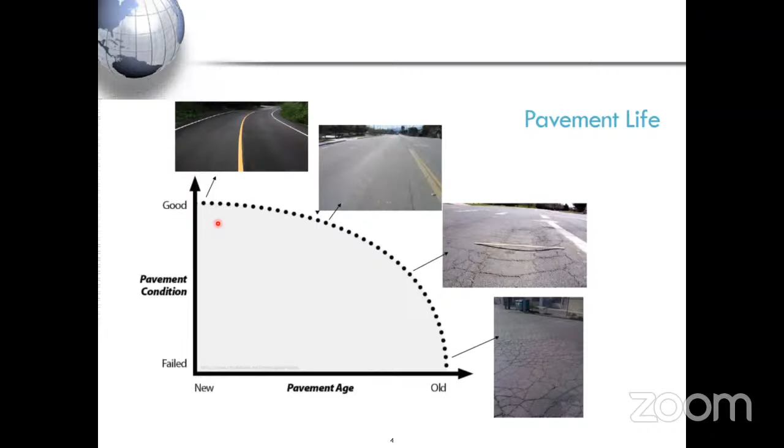But at the same time, we are also talking about words like asset monetization, asset management, or maintenance of these assets. So to maintain these assets, we need to evaluate them continuously. So there's a question - why should we evaluate?

This is how a new pavement's condition, if not evaluated, will in some years show a steep decrease in serviceability conditions, and then sooner or later it will again reach a failed condition.

Similarly, if you do the intervention again, a minor kind of intervention is required again - you have increased the serviceability conditions, it was decreasing again, some minor rehabilitation is done again. If you are not doing something, then maybe at the end of its design life you have to go for major rehabilitation.

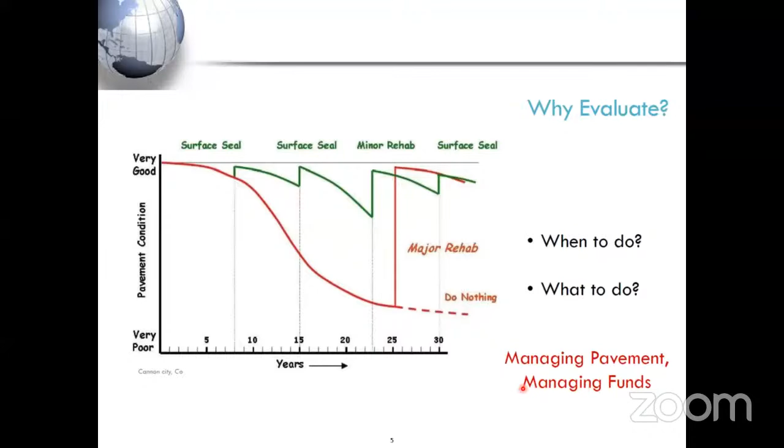This is a very brief general idea: whatever structure or asset we are building, it will deteriorate over time, when subjected to load and climate factors. Especially for pavements, the performance is a function of its relative ability to serve the traffic over a period of time, because that is the main purpose of the pavement. Until unless it is serving the traffic well, there is no problem. The only problem comes when it is not able to serve its traffic.

So it's a system of objective measurement in performance. Now the deep question is whether we should go for a subjective measurement or an objective measurement. Subjective measurement is based on perceptions. Objective measurement is something which gives us quantifiable values.

The period or frequency of evaluation is very much required to find out the structural condition and the remaining life a pavement is having - how much more the pavement can serve satisfactorily before failure. If I find out this design or remaining life, the residual life, I can manage my assets in a better way, but for that I need to do certain evaluation.

For that I need so many tools: collection of data, again some kind of equipment is required for this data collection, and analysis tools for how you are doing the analysis. At various levels you have to do the intervention, so what will be the economic considerations of those interventions? That is part of the analysis.

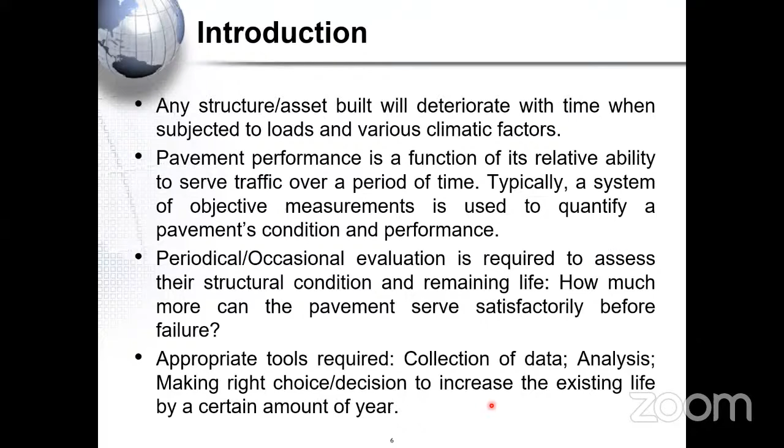And then finally, out of the various alternatives you will have, what are you choosing? So making the right choice and decision to increase the existing life by a certain number of years with limited funds - limited funds is again a very important consideration.

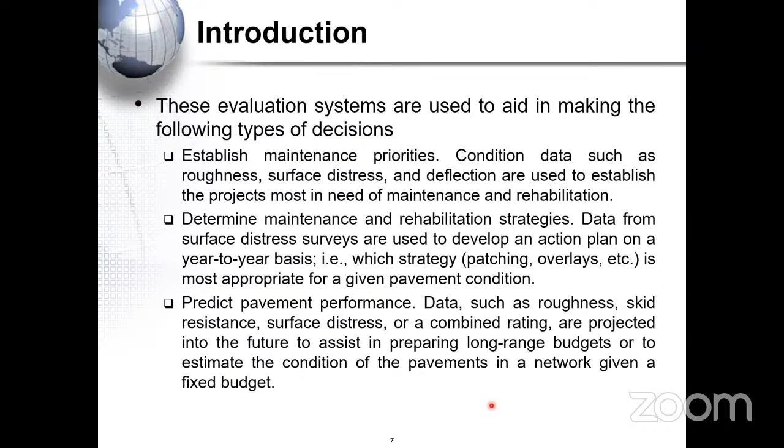We do various kinds of evaluations. We find out the maintenance priorities, then we determine the strategies, and then finally, after doing the rehabilitation, we again do the pavement performance evaluation. So this is all a vicious circle we need to do for our pavement.

Coming to the types of evaluation, most of you are very well known about this area. The two major types of evaluation we consider in our country are the functional and the structural evaluation. We have performance models for both structural and functional evaluations. Some countries consider safety evaluation as part of functional performance, while others consider it a different evaluation altogether - having structural performance, functional performance, and even safety performance separately. This depends on country to country, but right now we are considering safety as part of our functional performance.

We will come into detail about the functional and structural performance. So what we can understand by now is that the rate of deterioration of my pavement is a function of the initial condition.

If my quality control and quality assurance is not good, my new pavement is not well, so maybe the initial condition is not good, and there will be a more severe rate of deterioration. The traffic loading - higher the traffic loading, more the overloading, probably more will be the rate of deterioration. Harsher climatic conditions mean a higher rate of deterioration. Material properties, if not satisfying required limits, again increase the rate of deterioration. Similarly, there are various other parameters like surrounding land conditions and the kind of materials or chemical morphology of materials available - so many issues affecting the rate of deterioration of the pavement.

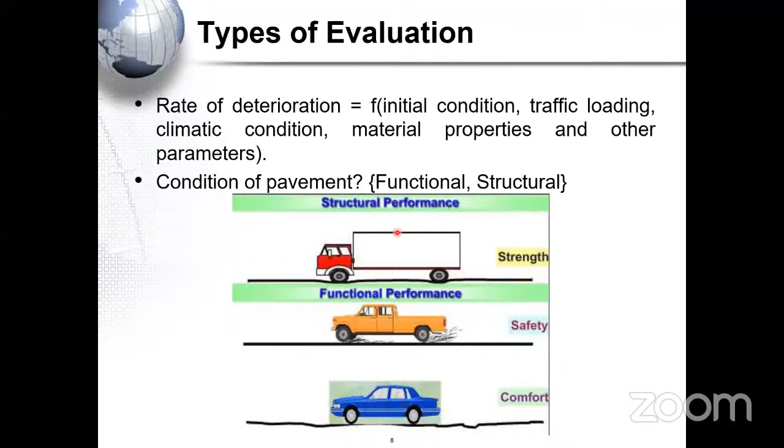But now to evaluate my pavement, I need to do some kind of performance evaluation. I can classify the performance evaluation into two types right now: functional and structural performance evaluation. Functional evaluation, very simply, covers whatever affects the user. For example, if some cracks are there but they are not affecting my riding quality, then probably cracking will not come under functional evaluation. So any structural failure, if it is there but not affecting my functional performance, it is not coming under the functional evaluation.

So it is totally based on the user's perspective. If a user is feeling good on a deteriorated pavement also, it means there is no problem with the functional evaluation, that there is no problem with the functional performance. So what do users expect, or what they want, is basically what we consider in the functional evaluation.

As a user, we always expect a comfortable, safe, and economic ride on our pavement surface. Strength is not considered as a factor by the user, and most users do not know what the strength of the pavement is. Only we pavement engineers know about the resilient modulus values of each layer, the CBR value of the base and sub-base layers. Most users know nothing about this. For them, if they haven't experienced any bumps, it was a very comfortable ride. So strength is probably not considered as a factor in the functional evaluation.

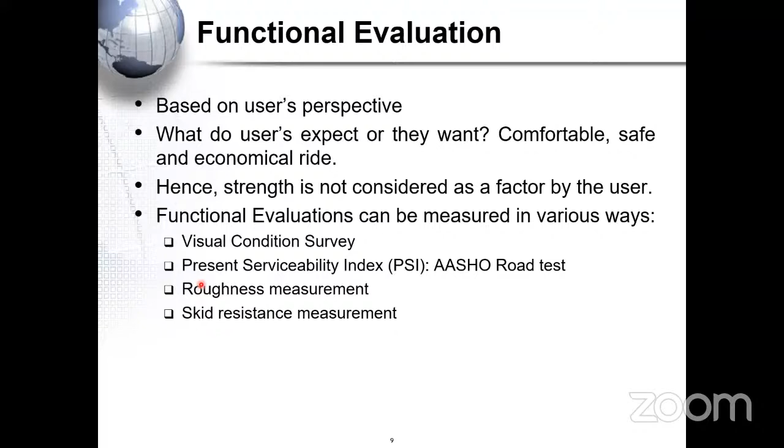When I talk about the first one, the distress evaluation, mostly it consists of a visual pavement condition survey. This visual pavement survey is sometimes easy and sometimes tough. For a small section, it is very easy to do this visual pavement condition survey. But for sections like kilometers long, hundreds or thousands of kilometers, it becomes very difficult to do this visual evaluation.

What we evaluate in the visual survey is the type of the distresses, the extent, and the severity. Extent means how long it is there in the section, and severity means how severe it is. If you talk about cracks, it's the width of the cracks. If you talk about potholes, it's the area and depth of the potholes. All this represents the severity of the visible distresses, so that corrective action can be taken.

For example, with cracks, they identified the length of the cracks with the help of a thread. Then they identified the width of the cracks, maybe within the range of less than 1 mm, 1 to 3 mm, more than 3 mm, etc.

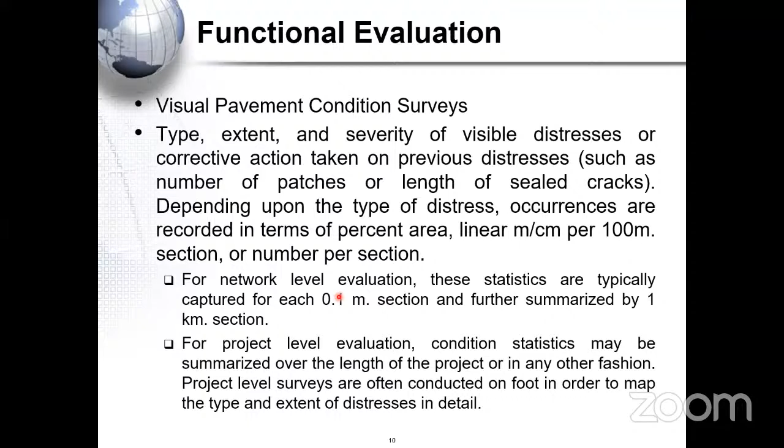When you are doing things verbally or visually by walking, you can visualize many distresses in more detail. But when you have to cover lengths of kilometers, sometimes the extent of detail is missing in those evaluations. These are some of the distresses observed in flexible pavement.

Right now I'm not going into detail, just taking the names. If you are already acquainted with these distresses, it is all good. If not, you can easily search on Google images, sometimes these are very easily seen there.

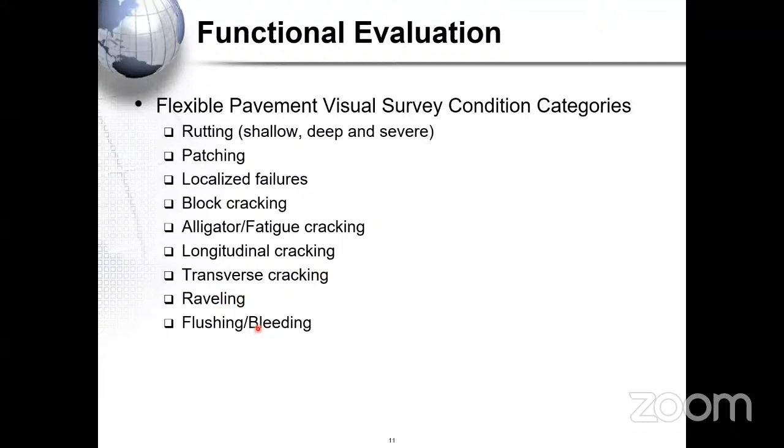Distresses like rutting, patching, localized failures, block cracking, alligator or fatigue cracking, longitudinal cracking, transverse cracking, raveling, flushing, bleeding. For rigid pavements there are spalling, punch outs, sometimes patches of binder, concrete patches or cement patches.

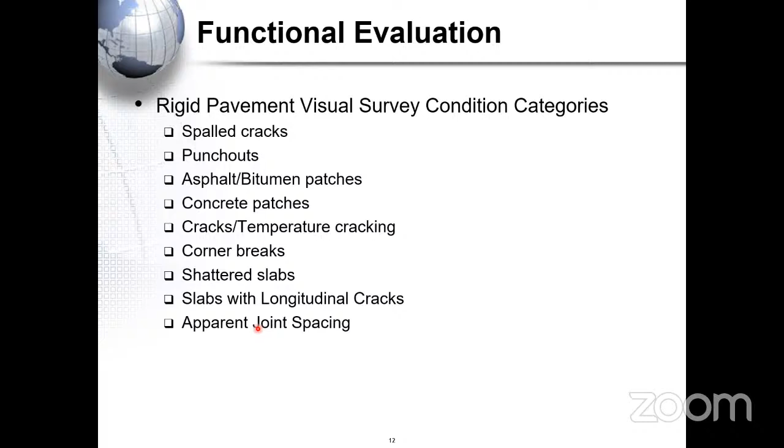Then there are temperature crackings like corner breaks, shattered slabs with longitudinal and transverse cracks. Then joint spacings opening up. All these are different kinds of failures.

Now coming to the evaluation part, how the history started. Initially, in 1962, people started the first road test designed by AASHO, and the outcome of that was PSI, the Pavement Serviceability Index, which they developed.

It was basically based on two different things: one is roughness and one is the distress condition of the pavement. After that, people developed a few more things like roughness index based indices, but that is totally based on roughness, with no incorporation of distresses in those indices.

There are different types of distress ratings, maybe from 0 to 5, where 0 to 1 is considered very poor. This could be filled out by a person or a group of people, and then you can come out to the average value.

The pavement classes can again be classified into different types. These are just examples, because different DOTs in the US have some different classification formats, so they classify pavements using different PSI values.

Depending upon these PSI values, you can easily find out what preventive maintenance you need and at what stage you have to take it, because this is already guided by particular DOTs or guidelines followed in different states.

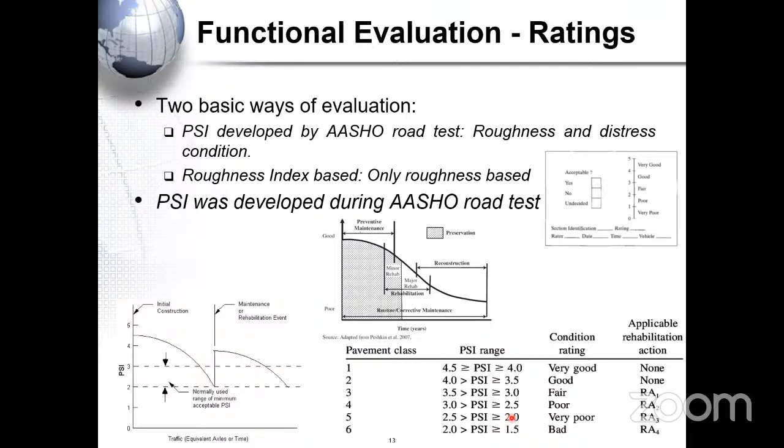Initially it was started with a group of 5 people. Out of those 5, one should definitely be an engineer in charge of that particular road, one should be an expert in pavement engineering or pavement maintenance, and one should be at least a regular user of that road who doesn't know anything about engineering. So these are the 3 minimum persons which should be there.

It could be 2 users with 2 engineers and 1 expert, or 2 experts with 1 engineer and 2 users, but these are the 3 different categories of people: user, engineer in charge, and pavement expert. These 3 should always be there to come to a general average rating value, identified between 0 to 5.

The PSI is a mathematical combination of certain parameters like slope variance, cracking, and patching distresses. We'll discuss these things. The performance index is the summary of the PSI over a period of time.

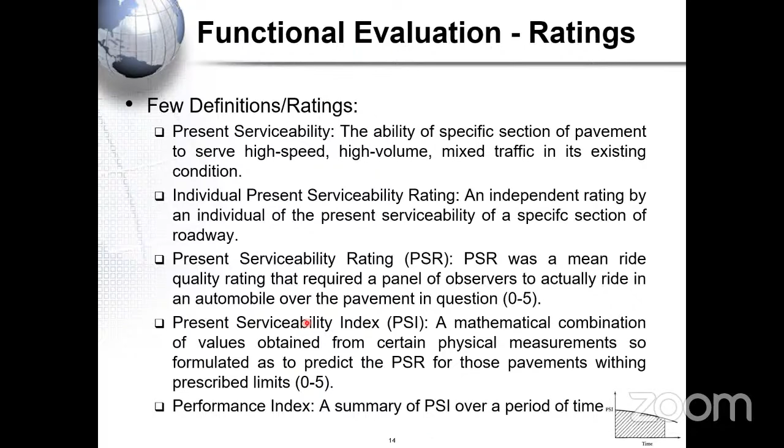I have not discussed these things in more detail because presently our focus is more on the evaluation part. So now coming to the objective, the first objective measurement which was given after the AASHO road test.

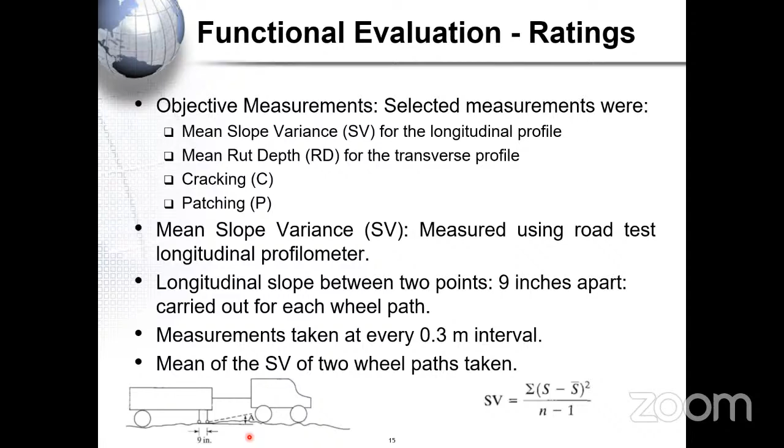Obviously this is a starting point of the evaluation techniques. I'm less focusing on this part because our idea is to discuss the present evaluation techniques and the futuristic evaluation techniques. So kindly bear with me if I'm going fast from this point, because I'm not going into much detail due to limited time.

Rut depth can be easily measured with the help of a straight edge, and in between we can find the depth with the help of a vernier caliper to be more accurate. This measurement has to be taken after every 6.1 meter interval.

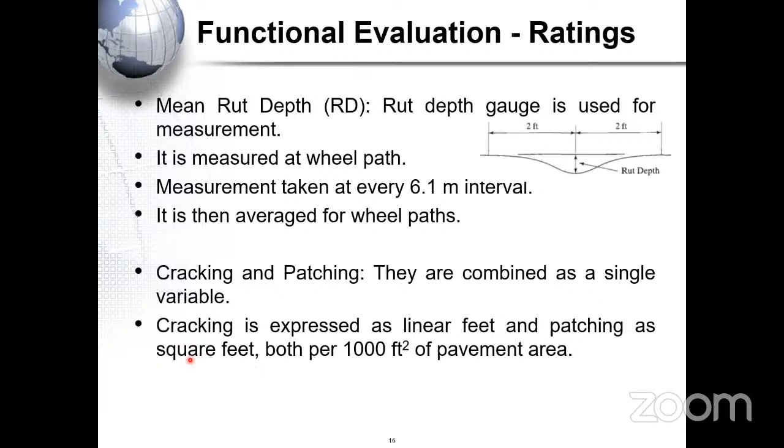Cracking and patching are both combined as a single variable, and they can be expressed as linear feet for cracking and as an area for patching, both per 1,000 square feet of the pavement area.

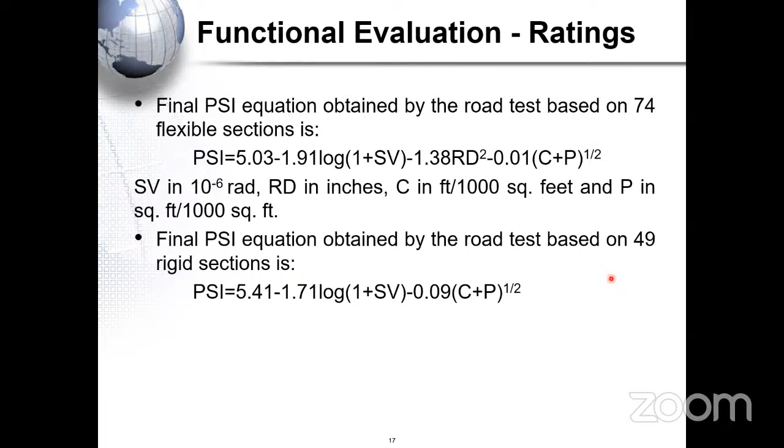So these equations basically use FPS units, because that was more prevalent in the USA. Still, many countries are relying on the PSI equations for deciding their maintenance alternatives.

But there are a few deficiencies in these PSI equations, because as I keep discussing, this equation was developed in 1962. The perception of people might have changed regarding serviceability in the last 4 to 5 decades.

Like at least the pavement is there, we are good - that was the expectation 4 to 5 decades ago. Now our expectations are very high with the pavement, so maybe these equations may not give you a correct serviceability index.

It includes both rideability and surface defects. The cracking and patching are something like your surface defect, and your slope variance talks about your rideability, since slope variance is more about the roughness part and cracking-patching more about the visual distresses part. So it is always good to have two different indices for these two different entities.

Again, for finding out roughness through slope variance, we need to use the profilometer, because there was a 9 inch gap between these two wheels to find out the slope variance. Nowadays we are not using profilometers, so these are some of the deficiencies that prevent us from using these PSI equations now.

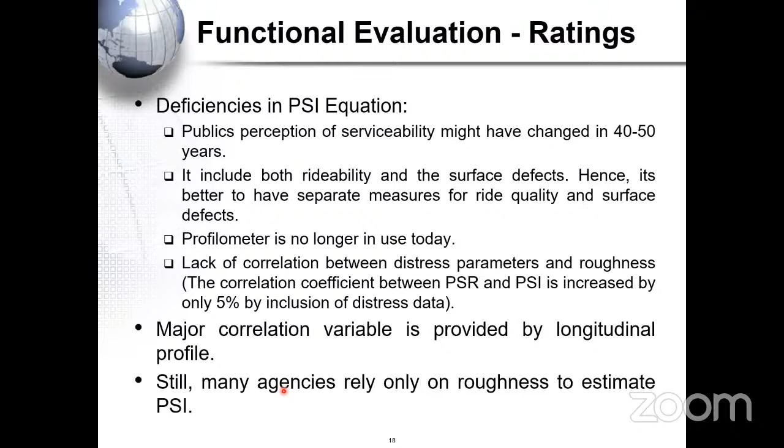Still many agencies rely only on the roughness to estimate the PSI. So there are few agencies that totally rely on the old PSI, specifically the roughness based PSI. What they have done is evaluated some roughness based indices, and then correlated those indices with the PSI, so you can find the PSI and correlate it with roughness only. This is how they have done it.

What became more prominent, more prevalent, and what happened after this test, was that roughness was being more explored by the people, especially in a big experiment done in Brazil.

They came up with a new parameter known as the International Roughness Index. It is considered to be a better parameter for measuring the road users' response in terms of comfort and convenience.

There are many equipments which can be used to find out the roughness in terms of IRI. The fifth wheel bump integrator we have used in the country since long, still we are using it. Merlin is a low cost equipment, although it's manual, we have to use it manually, but it is very cheap and cost effective. Sometimes this Merlin equipment can be used for checking the accuracy of our fifth wheel bump integrator also. Nowadays we are using much more automated equipments, which are based on laser.

Now coming to the IRI part. The roughness, people started working on it and realized there are two different methods of finding out the roughness: one is the direct method and one is the indirect method.

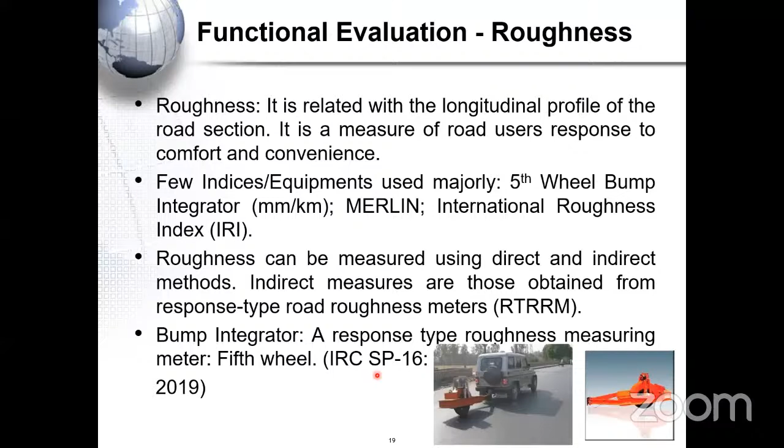This fifth wheel bump integrator, more details are given in IRC SP 16, the new version is 2019. It has to be used at a constant speed of 32 kilometers per hour, which is a good speed to cover long distances. The minimum standard tire pressure has to be maintained at 2.1 kg per centimeter square.

Whatever the vertical shocks are, that gets recorded in the fifth wheel bump integrator. The distance traveled is measured by counting revolutions of the wheel, there is a counter which finds the total revolutions and we find the total distance traveled. From the accumulated values of these vertical strokes we can find out the IRI. Although it doesn't give the IRI directly, it gives the value as BI. From that BI value, we have correlations by which we can express BI into roughness values in terms of mm per kilometer.

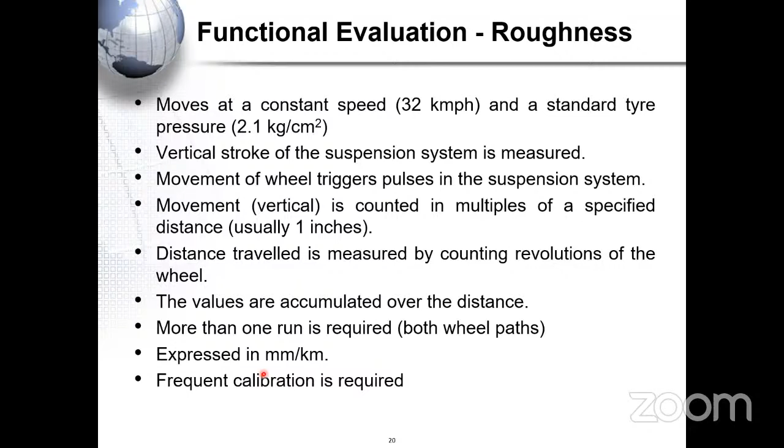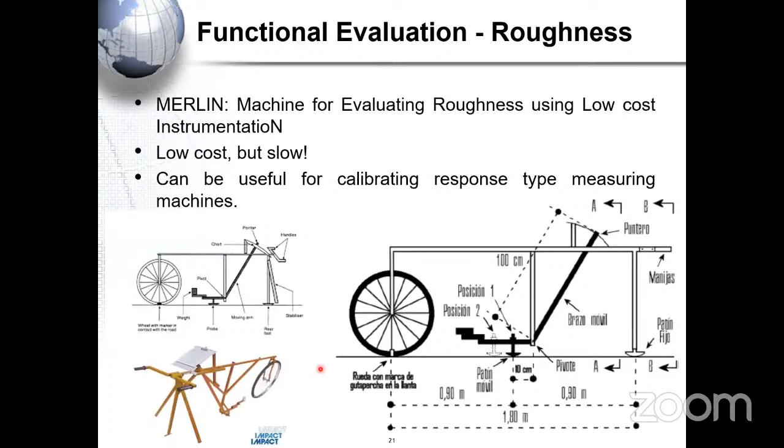Frequent calibration is required, which we can do with the help of the Merlin. This is a low cost but slow equipment, we can walk through this equipment. It has been designed by the Transport Research Laboratory in the UK, TRL.

The person who invented it was Cundill, M.A. We need to note down 200 values on a graph paper which is there on the sheet on our Merlin. After every revolution, you need to note down these points, and then you have to come to the value of D.

The value of D means the characteristic distance in which 90% of these roughness indicators are within this distance. Within this characteristic distance, you can find out the various values of IRI for different kinds of road surfaces as given in the manual.

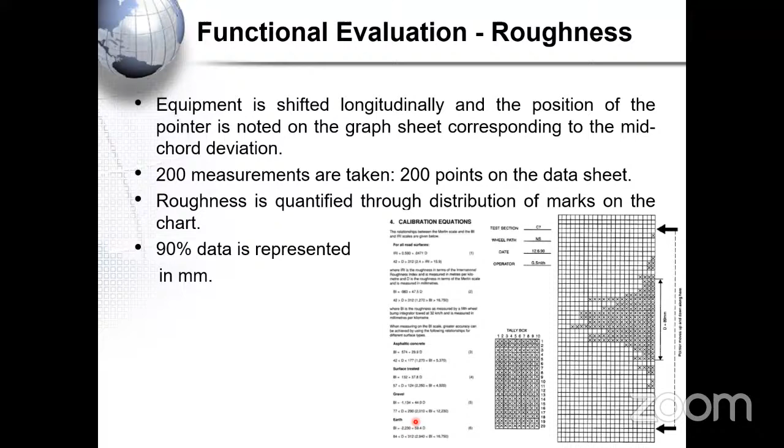So this is how the old things were. Nowadays we are using much more advanced equipment, something like laser profilometers, which have laser beams in the equipment ahead. Whenever it is moving, it gives laser beams and measures the profile, noting down the profile of the surface.

That profile surface is directly given in terms of values and directly given in terms of images to us. The good thing about this equipment is that it can do the survey as fast as 30 to 100 kilometers per hour. You can install this laser profilometer normally in front, sometimes in some vehicles they install it at the back also.

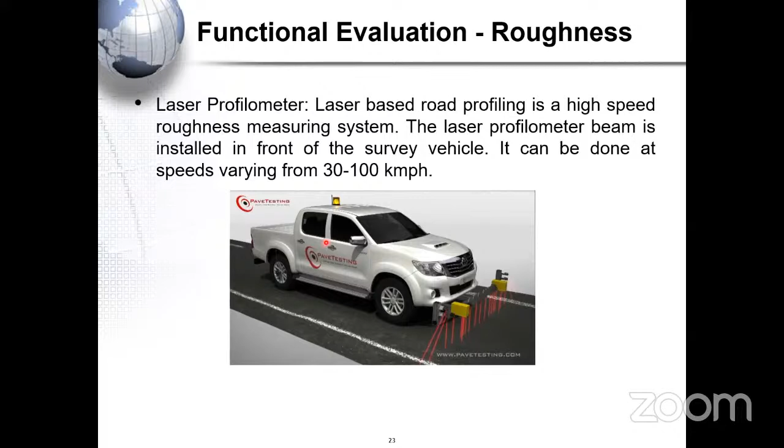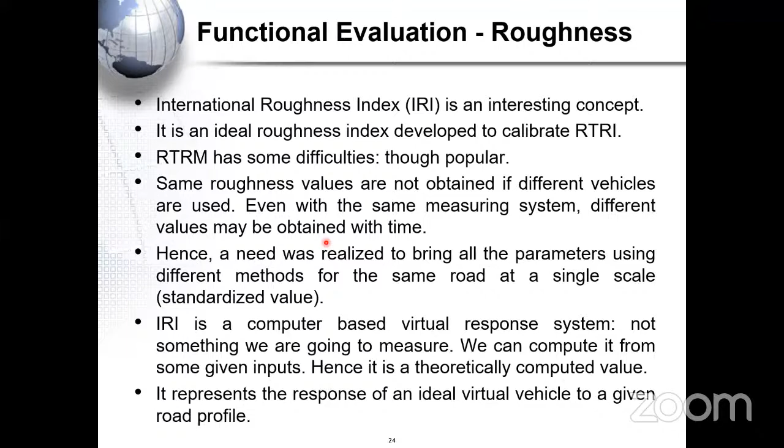The IRI is an interesting concept, but I think we have already covered half an hour, so it is not wise to cover the idea about IRI right now. So I'm skipping this IRI part for now.

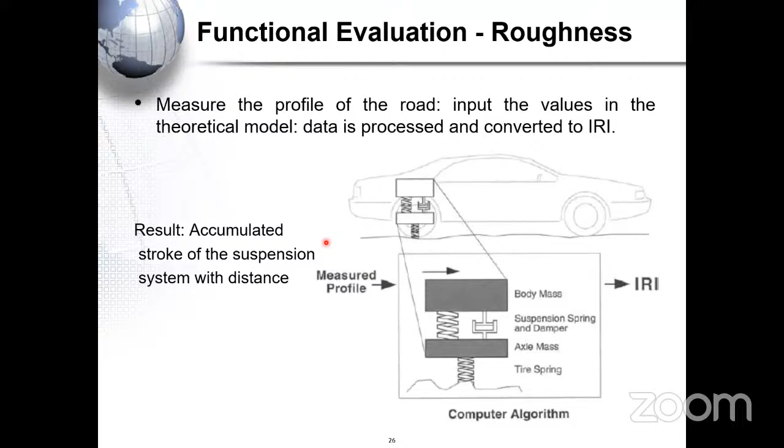Okay, it's a very interesting concept, the quarter car model - how these suspension and damping mechanisms are correlated with the IRI. It is a kind of indirect measurement which we have to use. These are the standards for the golden quarter car model: the stiffness should be 63.3, the stiffness of the tire spring should be 653, and we also have the damper rate, axle mass, and speed of the vehicle.

Now, the good thing is that we have given all our roughness index values on the IRI basis. With the IRI basis, we can also decide the kind of surfacing, depending upon the IRI. So if we are doing bituminous surfacing like BC, SMA, or SDBC, the minimum IRI we should get is in a certain order, and then we can classify these as good IRI surfaces, fair IRI surfaces, or poor IRI surfaces.

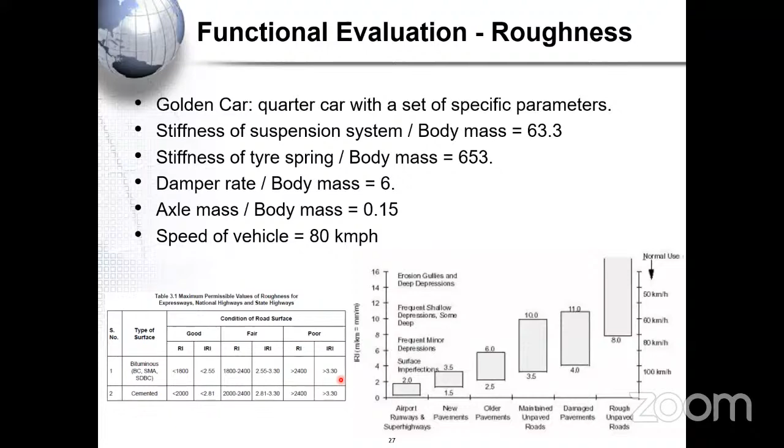All these things are given in IRC 82, the code for the evaluation and maintenance of flexible pavements. This also gives recommendations for selection of the appropriate roughness equipment - what kind of equipment you can use for different kinds of terrain and different speeds.

For terrain like plain, rolling, or hilly, at speed ranges of 10 to 40 kilometers, you can use various equipment like the fifth wheel bump integrator, automated road unevenness recorder, or even the car axle mounted bump integrator, etc.

For high speed facilities, normally now we have to use the laser profilometer or the ultrasonic sensor based profilometer. Most of our highways which are coming now have laser based profilometers included in the contract. So that is what we need.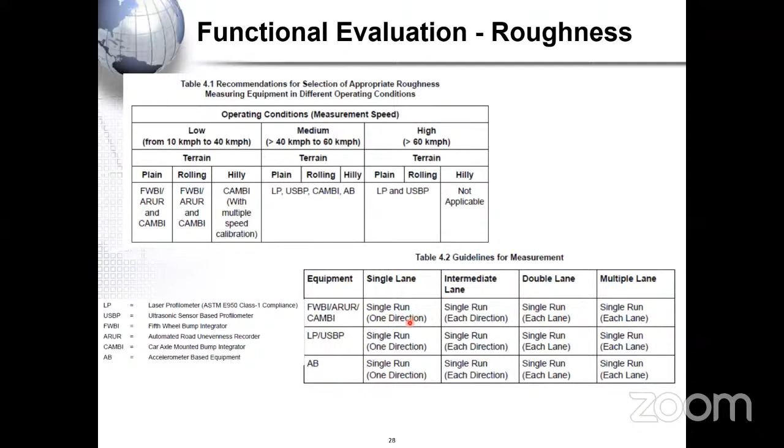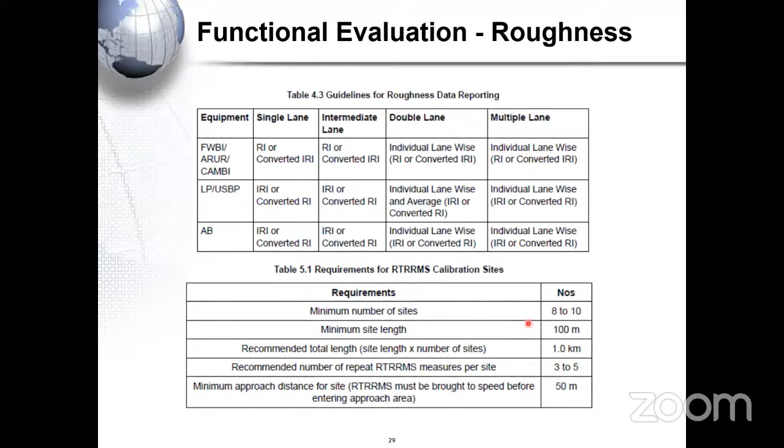Even the guidelines for measurement are given, like whether we have to do a single run in one direction or in both directions, up and down. All these things have been given in our code. Similarly, the guidelines for roughness data reporting - either you should give it in terms of roughness index or international roughness index values. IRI is normally a more prominent parameter which we normally use. For how many sites you need to calibrate is again all given in IRC 82.

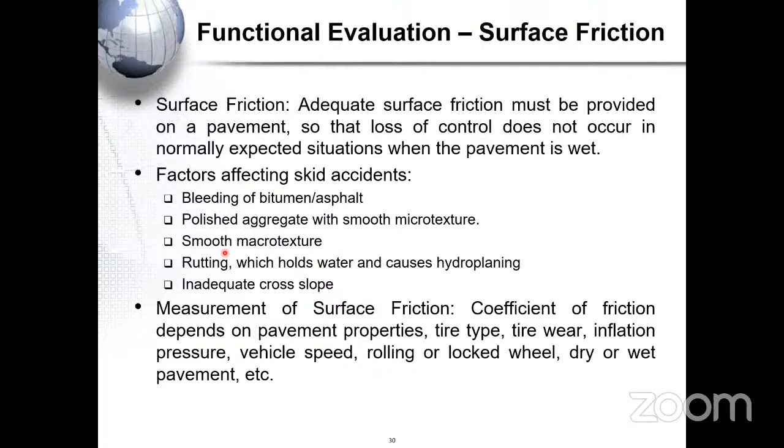Surface friction is again a second type of functional evaluation. We are more concerned about the safety of our vehicle - adequate surface friction should be there on the pavement so that we cannot lose control of the vehicle in expected situations, especially when the pavement is wet or slippery. There are a few factors like bleeding, polishing of the aggregate, smooth macro texture, hydroplaning, or inadequate cross slope which are considered.

Now, to find out the skidding, we are basically finding out the skid number. This skid number is directly correlated with the coefficient of friction, which is again a kind of dynamic value that exists when the tire and the pavement interact. Now this can be evaluated by various ways.

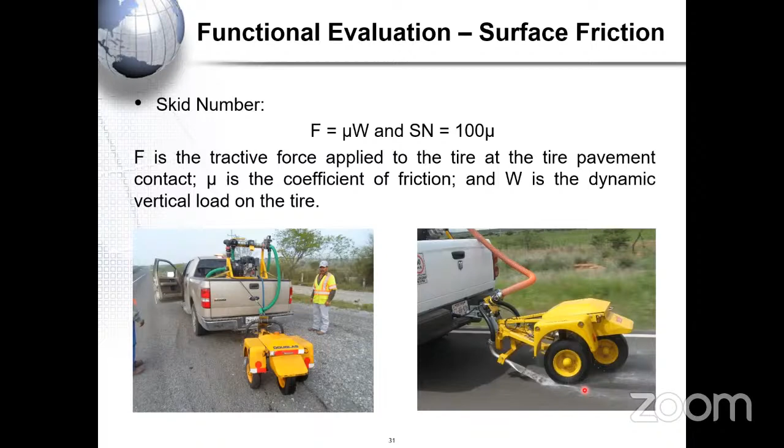This is a mu meter kind of equipment in which you can do it in a dry condition also, or even in a wet condition. So you do not need to wait for the rainy season - it can directly spray the water, and in that spraying of the water it can find out the skid number or the coefficient of friction. This is most widely used - very cheap, and mostly available in the labs also.

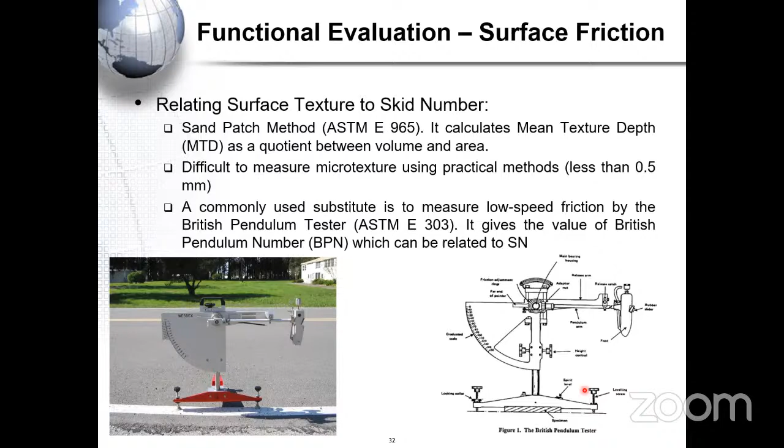The British pendulum tester can also be related to the skid number. It gives you the BPN value, and that BPN value can again be correlated with the skid number.

Now coming to surface defects, the best one is always the visual one, because once you visualize the distresses, as a human being you can use your brain for many things, including finding out the reasonings. But nowadays you cannot do a visual distress survey for kilometers of length, so you need some kind of image sensing technologies. Nowadays a combined vehicle having the laser profilometer and all these cameras can give you all this automated data.

These surface defects - cracks, deformations, disintegrations - all these can be found and done with the help of imaging techniques.

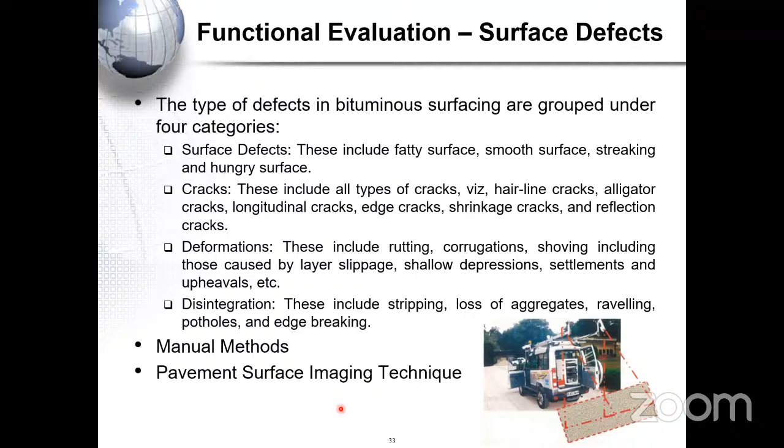Although there are some image based programs which are coordinating these machines, you need to be very sure about the accuracy of these programs, because sometimes the accuracy of these programs are not very good. So you need to again cross check these things with small stretches where you have already done the visual survey. You cannot directly and blindly follow the results coming out of the equipment.

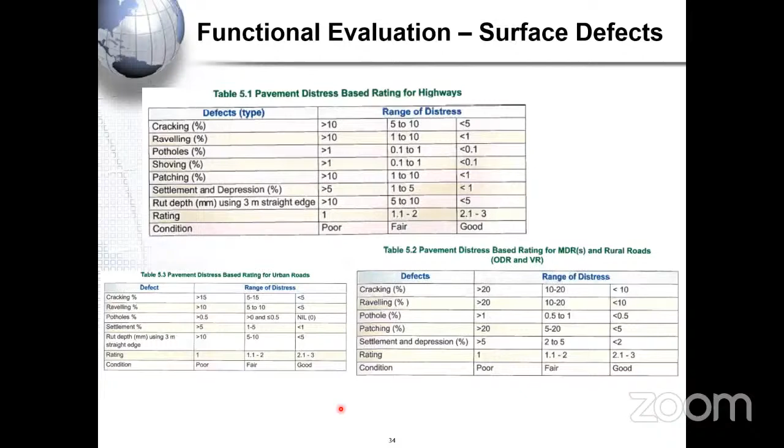This is just from the IRC 82. I've just taken what are the permissible levels of the distresses available, and how we designate these levels into poor, fair, and good conditions for the highways, urban roads, MDRs, and rural roads. This is the distress based measurement proforma given in the IRC.

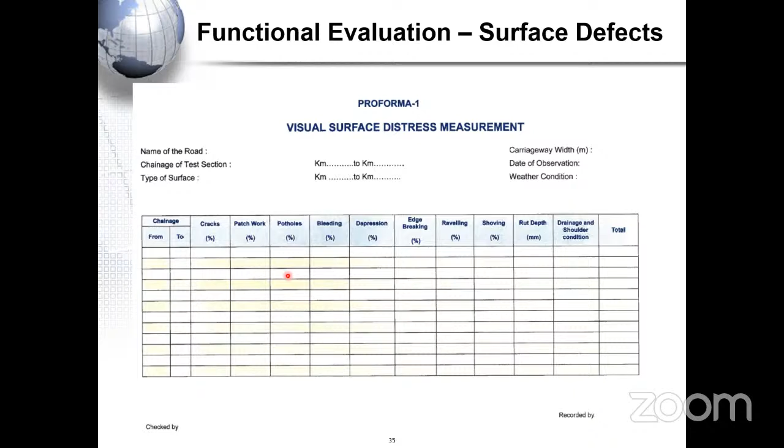This is again in terms of the area if you want to find out. These are some utility or weighted values, because there are so many different types of distresses. At a section you can get a high cracking but less patching, but you have to come to one value of either good, fair, or poor. So by the weighted values you can arrive at these values, like it's a good, fair, or poor condition.

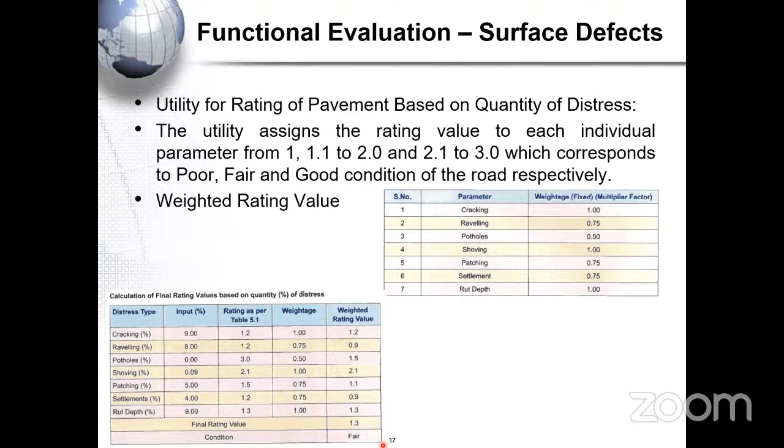These are some indicators of evaluation, some futuristic things about our pavement evaluations. Most of you must have heard that nowadays we are using a lot of unmanned aerial vehicles. There's a lot of research going on in this area of using UAVs or drones for evaluation or functional evaluation of our pavements.

The benefit is that a large area can be covered in a small time. Another benefit is it does not affect our traffic, since there's no vehicle moving so it will not disrupt traffic. The data, if we have the software, can be analyzed very fast. So whatever data you have, you can analyze it early and then come to the maintenance alternative.

But believe me, all these are giving you some kind of objective evaluation of your pavements. The decision still has to be taken by the engineer. The maintenance decision still has to be taken by the engineer.

Then there can be some application of intelligent systems. You can use artificial intelligence programs also, so that if they are finding some distresses, some kind of cracks, using artificial intelligence they can even find out the cracks. So if they can find out that alligator type cracking is there, which has already been fed into the AI systems, it can tell you that probably fatigue failure is there. So you can use AI and ML techniques as a supplement to this data which is coming through the UAV or drones.

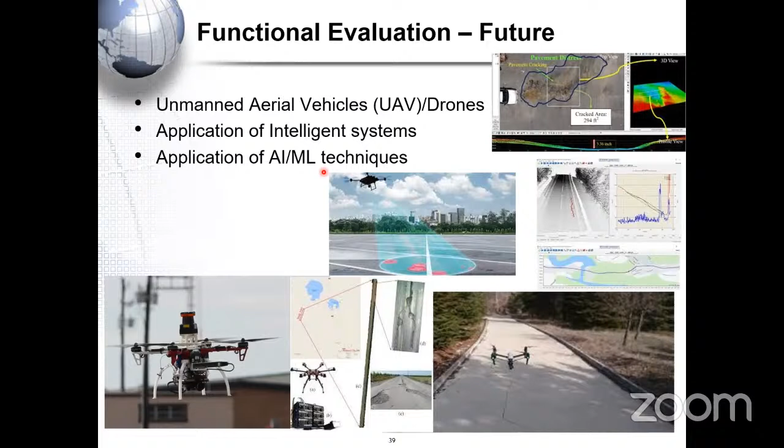This is something about Bangalore I was reading. There was a thing that even for low volume roads now they are scanning it with the help of UAVs, the unmanned aerial vehicles. So this kind of technology is hitting the ground very fast. We need to be very vigilant, but we should be very clear about what are the advantages of these techniques and what are the disadvantages, or where we should be careful while using these techniques.

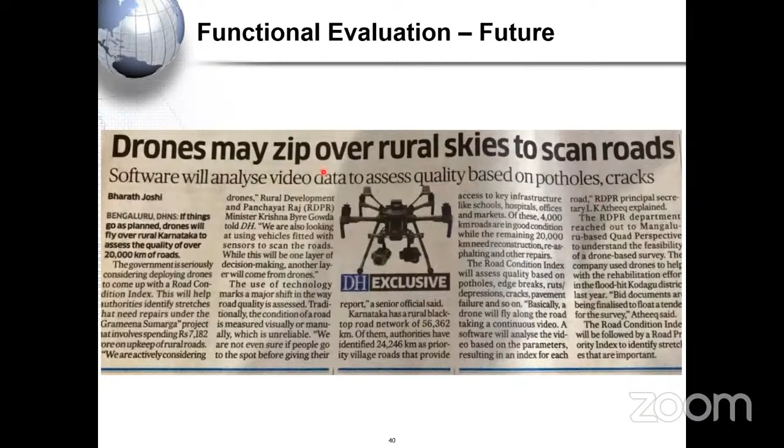Coming to the other part, the structural evaluation part. We are more focused on the structural condition of the pavement. Maybe my surface is very good, the users are very happy with the road, but I need to evaluate the structural condition because maybe there is some failure which has initiated from the bottom of my layer. So therefore I am very much concerned about the structural evaluation. It is majorly required for finding out the remaining life of my pavement.

And if the remaining life is less, then I can go with the overlay thickness.

The two major types are destructive and non-destructive. In destructive testing, we have to cut the pavements, by making big holes or by taking cores, collecting samples, and testing in laboratories. In non-destructive testing, we apply a certain loading and get the responses for those loads, or use different kinds of waves traveling inside the pavement layers. The movement of those waves can tell us about the material properties of those particular layers.

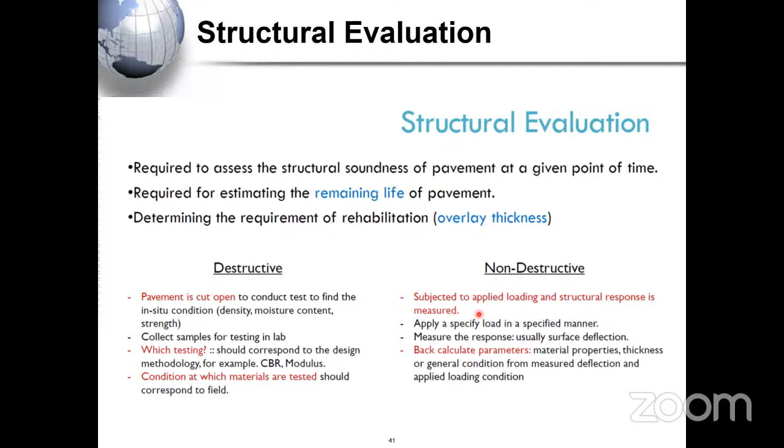Then we can do a kind of back calculation. How this structural evaluation started is again the same kind of test done by WASHO, the Western Association of State Highway Officials, and then CGRA, the Canadian Good Roads Association. These were the two agencies who started structural evaluation long back.

Their whole idea was to find out the deflection value, and they correlated the structural performance of a pavement on the basis of the maximum deflection value.

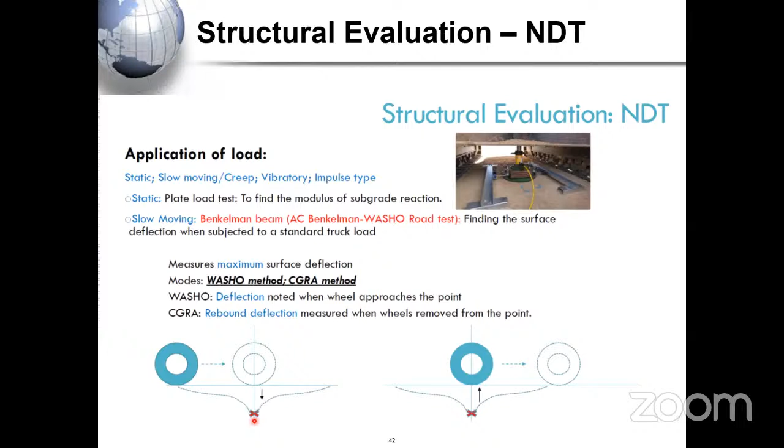There were some shortcomings in this structural evaluation because different kinds of pavements could get the same amount of deflection value, but the pavement responses could be different. For one pavement, a long distance is facing some deflection, and you get the maximum deflection there. For another pavement, the maximum deflection is the same, but the response is limited to a certain distance. So a single deflection measurement sometimes does not give an accurate value.

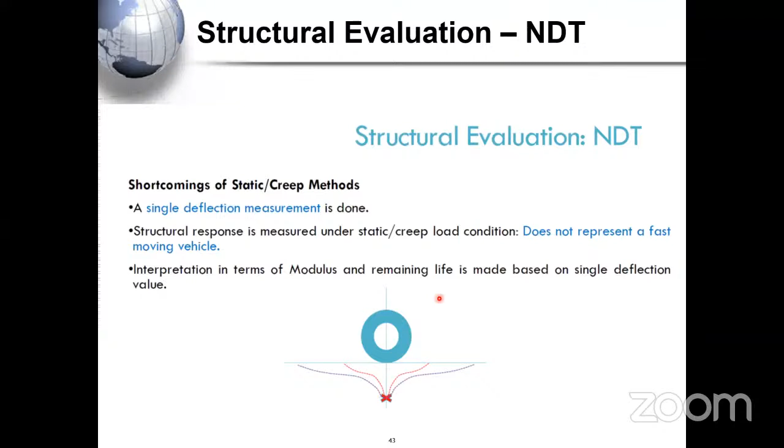We realized this, and then moved from the Benkelman beam deflection to the falling weight deflectometer method. The structural response was initially measured under static and creep load conditions, which only represents a slow moving vehicle, not a fast moving one. We interpret this maximum deflection value into modulus and remaining life, which is probably not a very accurate method.

So then we started with the falling weight deflectometer, which gives you the full deflection bowl - the response bowl obtained by various geophones attached to this falling weight deflectometer. You get a full deflection bowl, and probably more accurate values of the surface properties or modulus values can be found out.

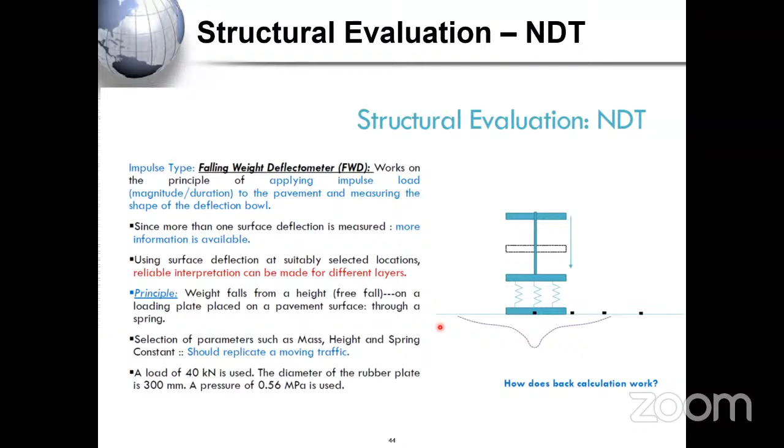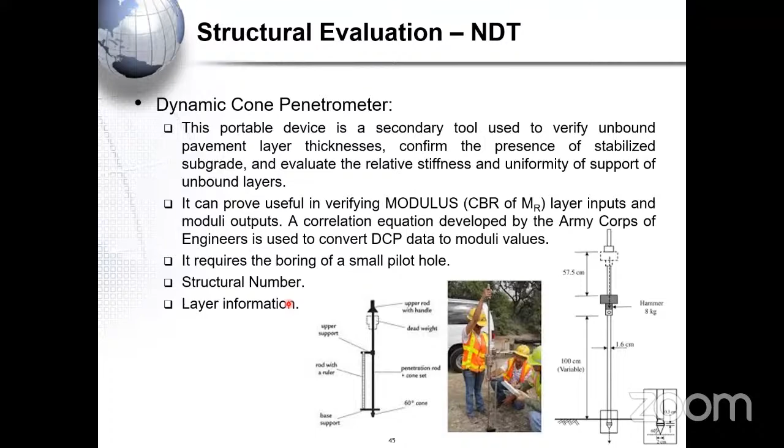This is a simpler one, the dynamic cone penetrometer - a low cost, portable device. It can be correlated with CBR values, but it should only be used for unbound layers. It's not wise to use this equipment for bound layers like bituminous layers. It's always good to use the dynamic cone penetrometer for unbound layers, like base, sub-base, or even subgrade. It can give various information like layer information, modulus values, and even the structural number of the layers beneath - structural number being a kind of number representing the strength value.

Then, and still in a few areas, the air coupled ground penetrating radar, or simply GPR, is being used. It's a van mounted system providing a continuous profile of layer thickness and dielectric variations - basically variations in terms of modulus or strength values - to a maximum depth of about 60 centimeters or 600 mm beneath the pavement surface.

So with that layer, we can easily find out the strength properties of our bituminous layers and the base and sub-base layers. The dielectric properties are correlated to material density and moisture content, so subsurface problems in existing hot mix asphalt and excessive moisture in base layers can be easily detected. GPR can also identify segregation of materials beneath the layers and low density of materials in existing HMA. For PCC, or cement concrete pavements, it's not much useful because of the similar kind of material present.

Even nowadays they are using this GPR on drones, which is again a kind of future research. People are still finding out the appropriate height the drones should fly at to note down these values.

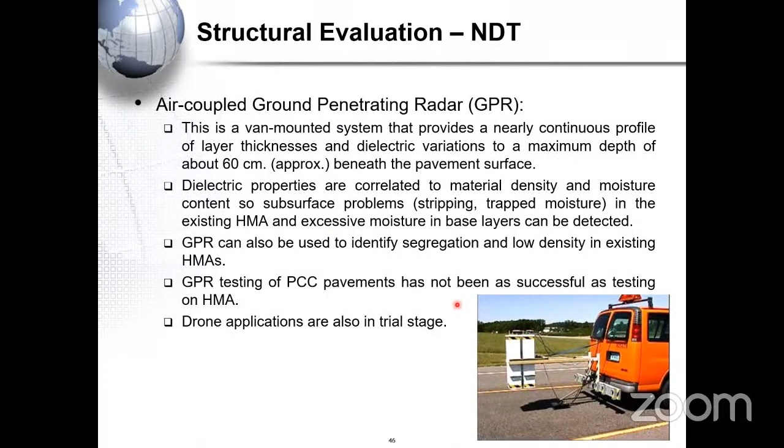Then there are some ground coupled GPRs. The only difference between these and the air coupled one is that it is in the air, so it is not having a direct contact with the surface. The ground coupled one has more surface contact. That's the only difference. I'll not go into much detail about the working methodology of the GPR.

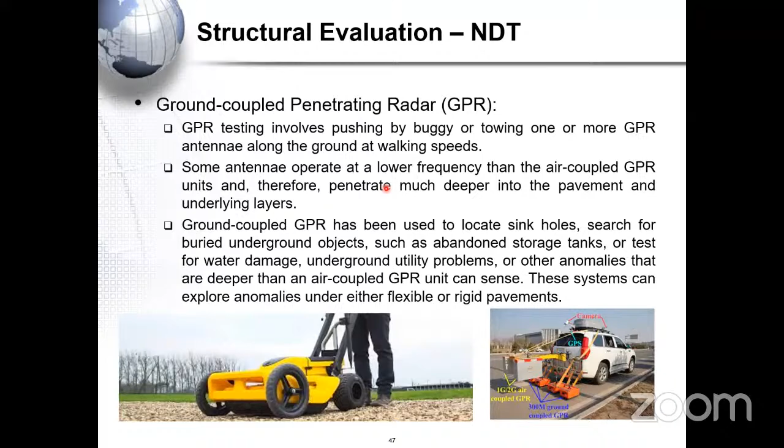Then coming to the seismic based tools, the fundamentals are again the same: we are basically imparting a wave, which is traveling in the pavement surface, and on the opposite side we are encountering those waves. The time period in which the wave is traveling gives an indication about the material properties. This is the portable seismic pavement analyzer. There are different types like Dirt, SPA, V-meter, free-free resonant column.

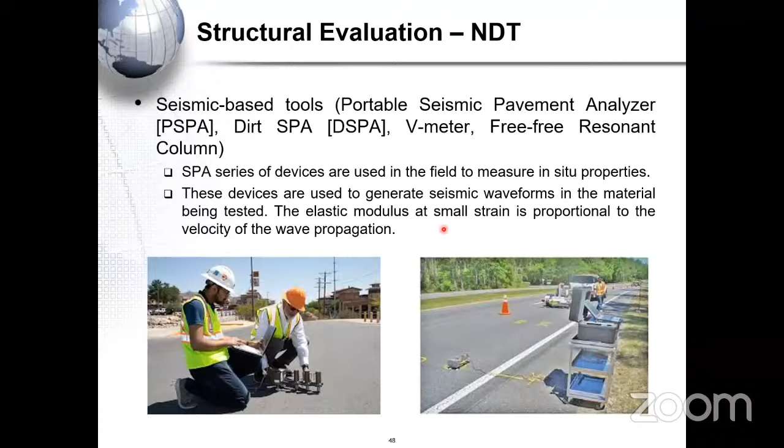There are some changes in their technologies. I am not very much aware, as I have not worked in this area. These portable seismic pavement analyzers are devices used in the field to measure the in-situ properties of the pavement layers. They generate seismic waveforms in the material being tested. The elastic modulus at small strain is proportional to the velocity of wave propagation, and this device works on that principle.

Then there is something more advanced, the total pavement acceptance device, a very costly one. It is majorly used for airport pavements, by some of the busiest airports, or for some expressways. Still in India, I have not seen anyone talking about or having this kind of device.

This device has the capability of everything. It talks about the rolling dynamic deflectometer, so it is rolling, and with its help it takes deflection values and also does GPR. So it's an air-coupled GPR combined with a deflectometer, both things are there. Additionally, it gives a high-definition video of the surface, linear offsets in terms of the two wheel surfaces, high precision differential GPS coordinates, and surface temperature logging, up to the pavement sections, conducted simultaneously. So there are many things done with this total pavement acceptance device.

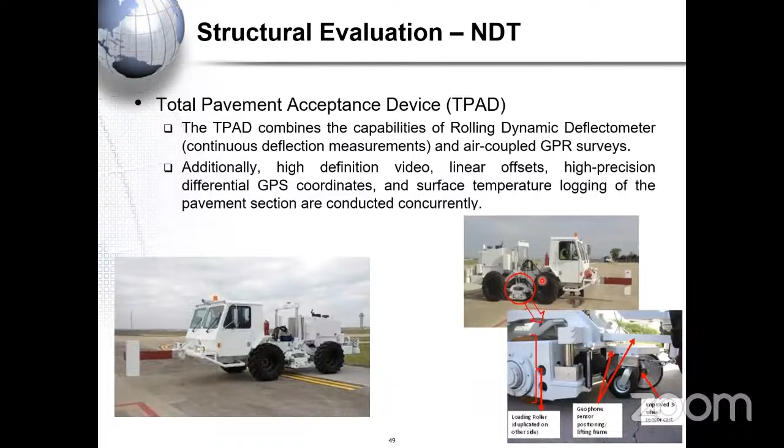The last one, we can always do these things with destructive evaluation, which is a more conventional method. We can cut down some excavated area, or take some cores, and then find out the properties in the lab. That is the destructive evaluation of pavement structural properties.

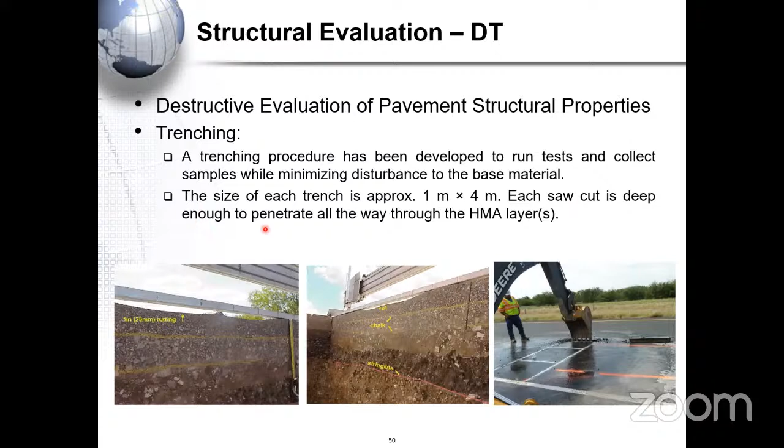The first one is trenching, a big area which you need to trench down. Trenching has been developed to run tests and collect samples while minimizing disturbance to the base material, so we disturb only the surface layers, not the base. The trench sizes are larger, in the range of 1 meter by 4 meter, and each saw cut is deep enough to penetrate all the way through the HMA, so all the HMA layers are cut through.

Otherwise, the most widely used type of destructive evaluation worldwide is coring. We take core samples with a 10 centimeter bit or a 15 centimeter bit, meaning core bits of either 100 mm or 150 mm, and then evaluate those core samples in our laboratory.

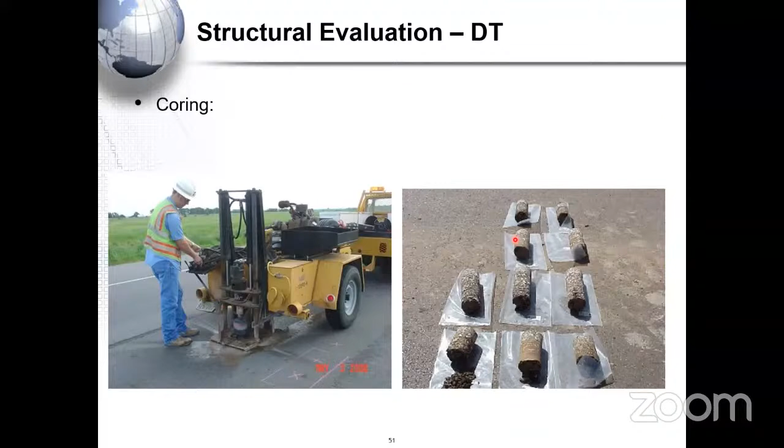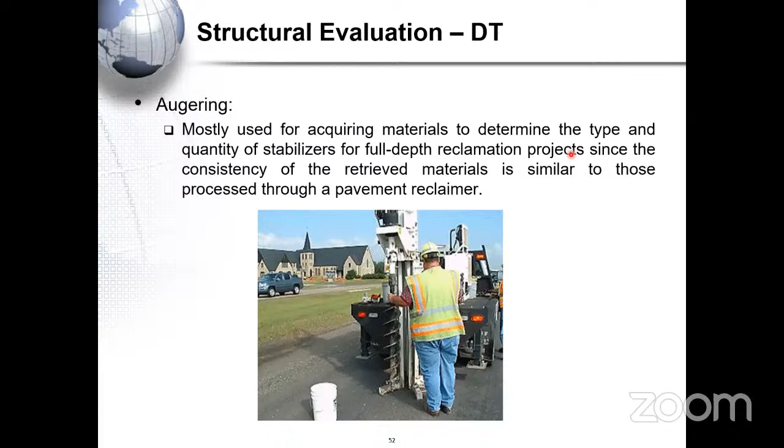This is the augering part, where you are not taking the core but drilling the surface and taking the material out. So here you don't get a core, just the material from inside. It is mostly used for acquiring materials to determine the depth and quantity of the stabilizers used for full depth reclamation projects, that is, up to what depth the stabilizers have been used and the stabilized layers exist. So it's a quality control kind of thing, or can also be used at a later stage for evaluation.

Yeah, I was a bit fast so that I want to have some time for the interaction.

Finally, the opportunities part: the condition rating is still a gray area. It needs a lot of data, and whatever old PSI values and PSI equations are there, unfortunately we do not have any such equations for our Indian roads. So this is always a very good area for us to do research. But I understand the bigger challenge of data. It requires considerable effort from the whole community, then we can come to certain better models.

More research efforts are required to work on low cost equipment, something many agencies are facing challenges with now, because things are coming into the contracting mechanism. The more sophisticated the instrument, the more skilled workforce is required. So if we can come up with low cost equipment, the technology is quite helpful and friendly to us. The only thing we need is to devise those equipments so that the cost is less.

Those working in the data analytics area, again, a wide domain is open for them. How to use this AIML? AIML is a very fancy word, but how to exactly use it? Can this be a more intelligent AIML so that it can help us make decisions also? It has a wide scope, and it can really bring revolutionary changes, especially in the accuracy and reliability of its results.

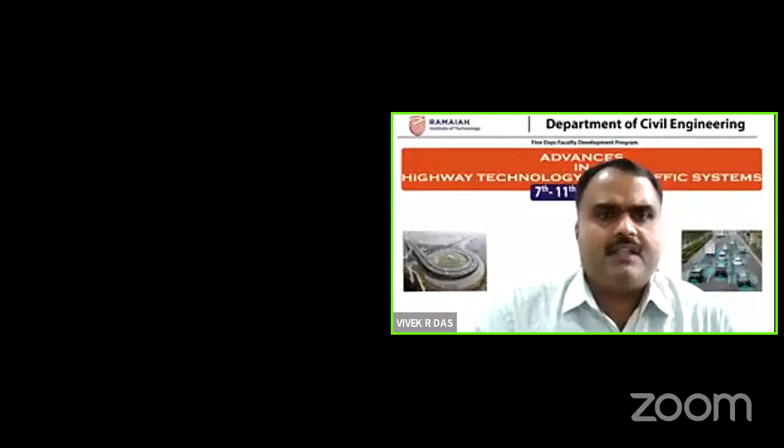Now for participants, I will conclude today's sessions. Today we had 3 sessions, mainly on pavement engineering. The first session was done by Dr. Satish Chandra, former director of CRRI and current professor at IIT Roorkee. Sir explained mainly with respect to the 4 pillars of sustainability, that is environmental, economic, social, and cultural influence, and different types of sustainable materials like copper slag and steel slag used in the field.

The second talk was also very useful, explained by one of the eminent experts in concrete technology in our country, Dr. M C Nataraja. His talk was on high strength concrete in rigid pavement. Sir explained characterization of aggregates and cementitious materials from the point of durability and performance specification, and also talked on the importance of mineral and chemical admixtures for durability and high performance concrete.

The third talk was made by Dr. Ankit Gupta from IIT BHU on the topic of advances in pavement evaluation. He talked on different types of evaluation, explaining in detail functional and structural evaluation of pavements and also futuristic technologies. Now with this we will conclude the session. I think today's sessions were very informative and knowledgeable for you. I also want to make a small announcement that tomorrow's presentation has been preponed to 9:30 since the resource person has a meeting at 11 o'clock.